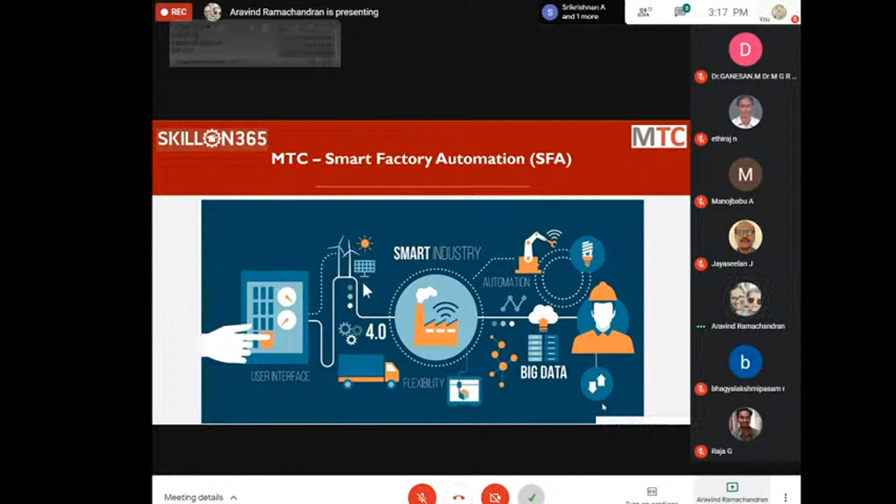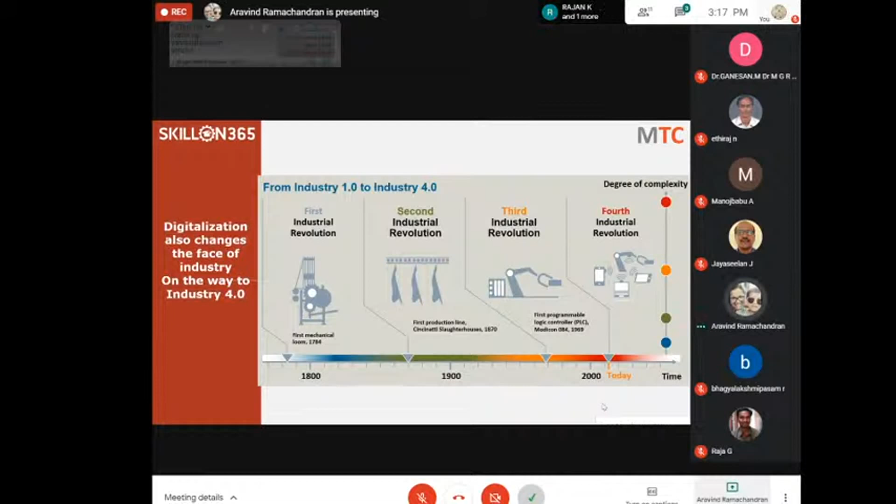This is again a common slide that we would have seen in many places - Industry 4.0, the evolution of Industry 4.0. So 1.0 started with a basic mechanical kind of assembly, and then in 2.0 a basic production line was introduced with motors and stuff like that. 3.0 is where the revolution actually started being recognized, with some kind of robotics, PLC automation, and basic automation being introduced. And then now we have 4.0. So let's see what is there in 4.0.

As I explained in the beginning, industry does not consume it just like that. Industry will look for a solution which will resolve their concerns or issues, or give them benefits and improvement, which will help them gain profits. So there are a lot of conditions or requirements that industry is looking at, and we have segregated that into 4 main modules: speed, flexibility, quality, and efficiency.

Speed to market is very relevant with the topic we are discussing today. Let's take an example - Hyundai Creta is there, and I work for Ford. I want to release a competitive car for it, say Ford EcoSport. If I release Ford EcoSport after 2 years, will I have any market share? No. I have to release something in 1 month or 2 months so that my market share is there, so I compete equally with Hyundai Creta and ensure that I have some market share.

So speed to market is very, very important that everybody is looking at right now. When I say speed to manufacturing, speed in design, speed in research, speed in testing - all those things. We want the product to be up and running immediately. Even ourselves, if we order something on Flipkart, say a mobile phone, and if the delivery time is 1 week, we ourselves get upset. We would like to have that immediately, in the next 1 hour in our hand. That's something everybody is right now looking at.

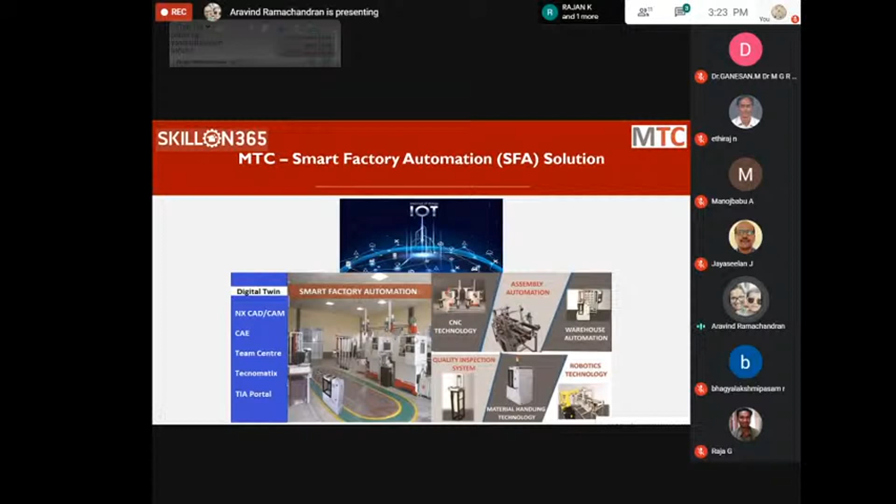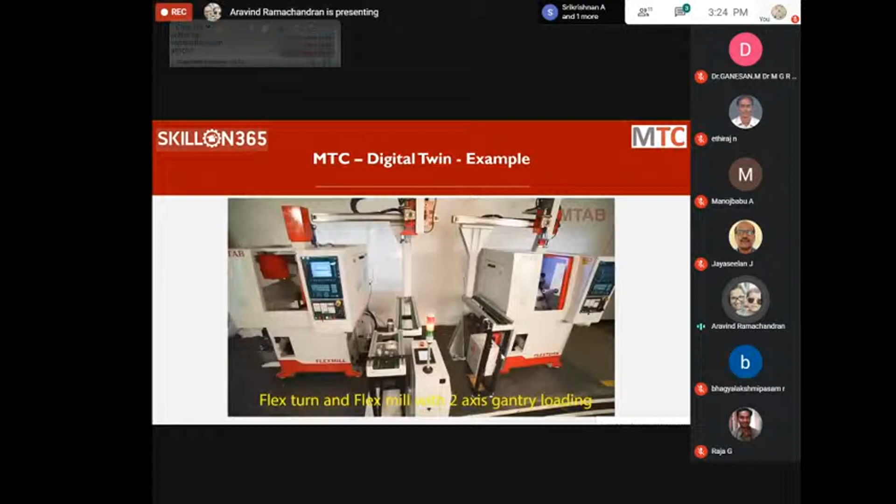This is, as I mentioned, an example of a manufacturing industry, how a smart manufacturing industry will work. So let's first, if I'm the supervisor or manager of the factory, what I will do is first I will understand the infrastructure of it. Well, in general, what are the infrastructure of a manufacturing industry? There will be one store to store the raw material or the finished goods.

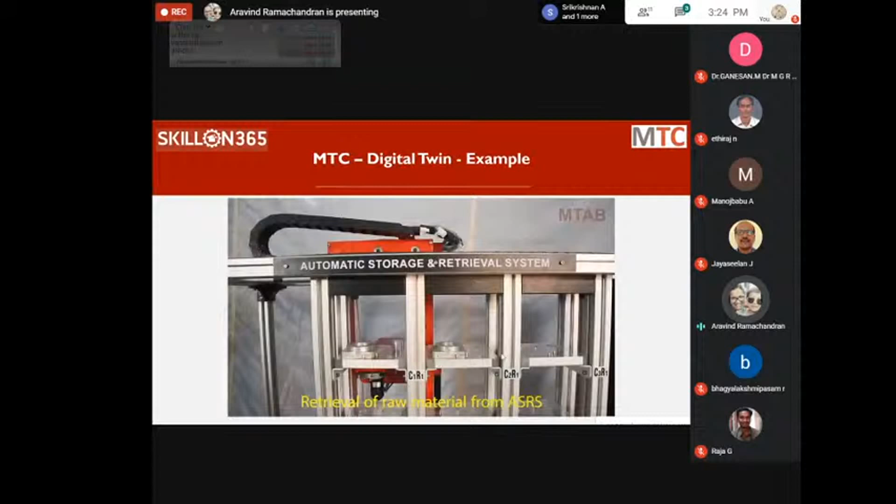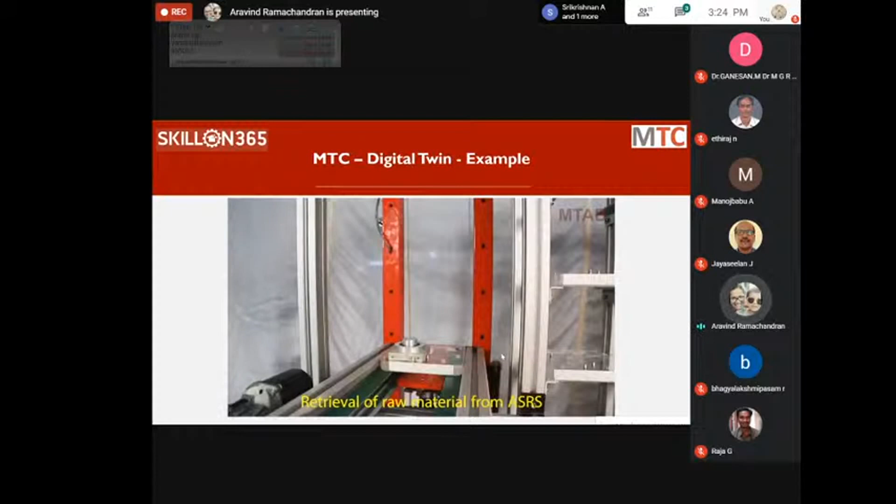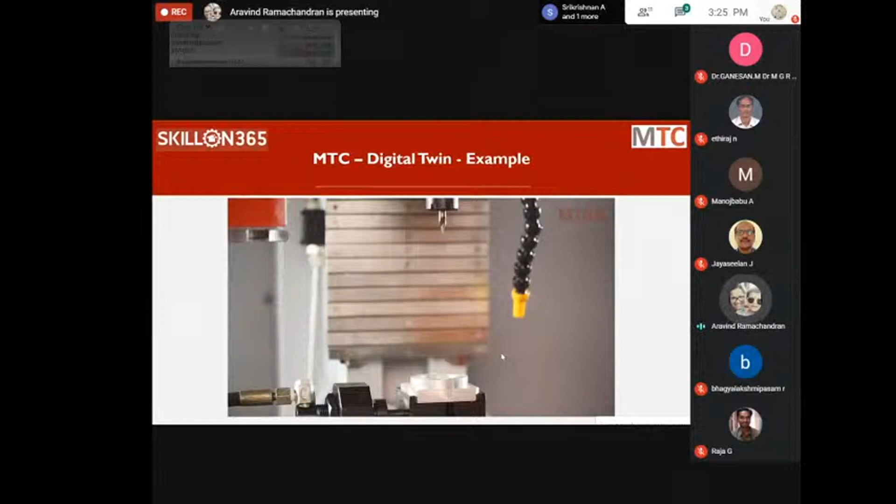Then there will be a manufacturing area, right, where the goods are manufactured, like a machine or some production happening. Then assembly area will be there - whatever components it is manufactured or produced will go there for assembly area to get assembled. Then there will be a quality department where it will be inspected for some quality checking. And then finally, according to either it has to go for remachining or just store it back, whatever it is - an inspection station for quality checking, right? So these are the infrastructure and the processes involved.

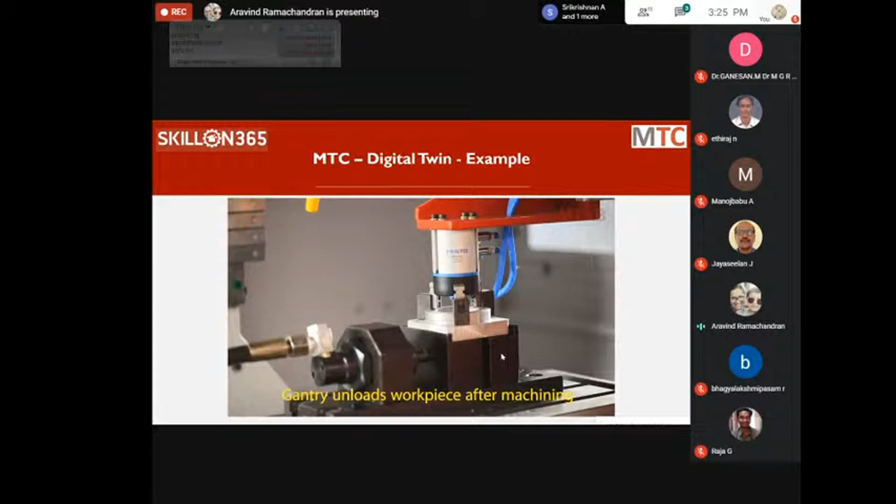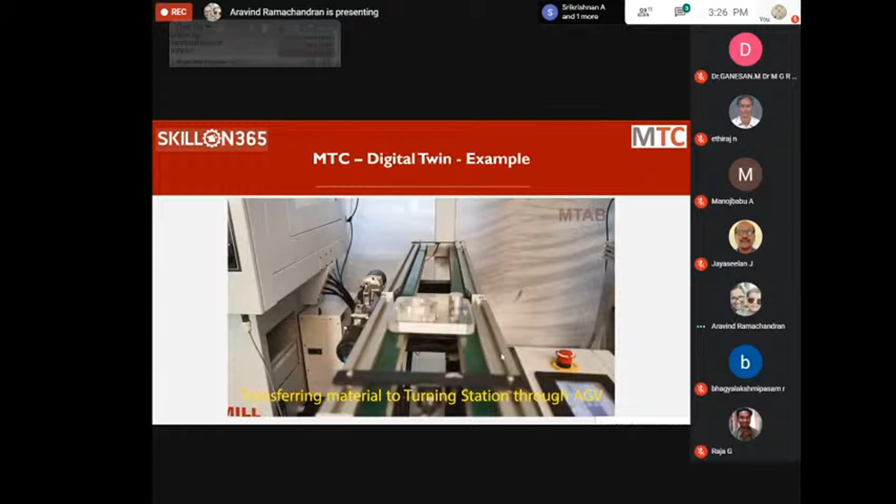And as I mentioned, this is completely automated. This is a gantry arm, a robotic gantry arm, used for automatic loading and unloading. And there is a transfer conveyor to transport the material to different areas. And this is the AGV - the one which is moving is the automated guided vehicle. So the automated guided vehicle is which transports the material to different stations. Because since it is automated, there is no manual intervention here at all, right?

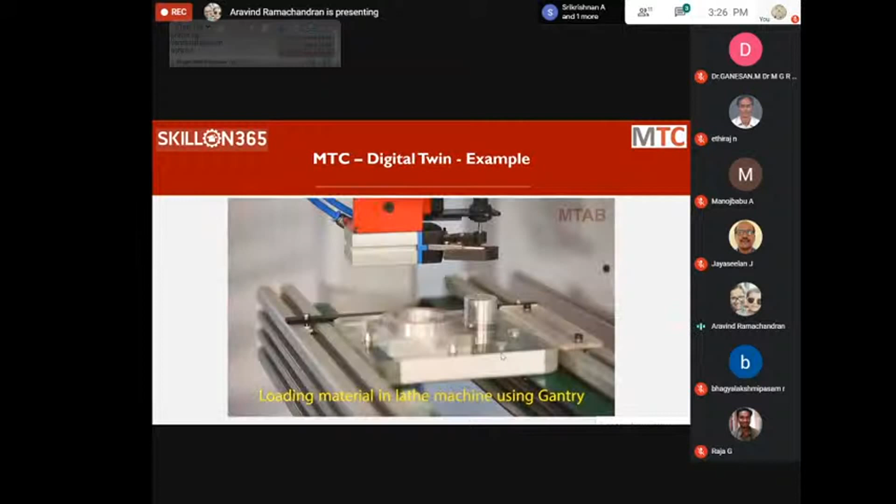So here, what product we are manufacturing is a bearing and a shaft assembly. So there is a shaft and a bearing gets assembled in it, and then there is a lock which locks it. This is the product that we are manufacturing - it's one component that we are manufacturing.

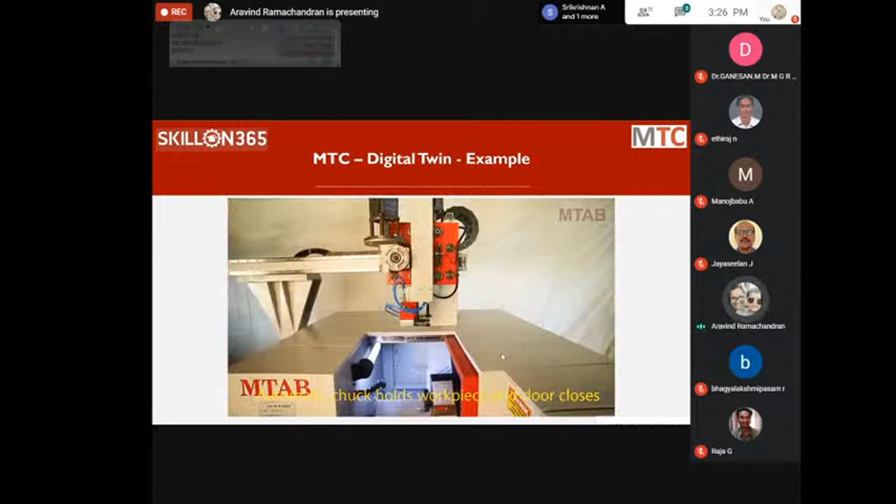In this product, there are two components: one is a shaft and the other is the lock. This is the lock, which is getting machined in the lathe machine. First, the shaft got machined in the milling machine.

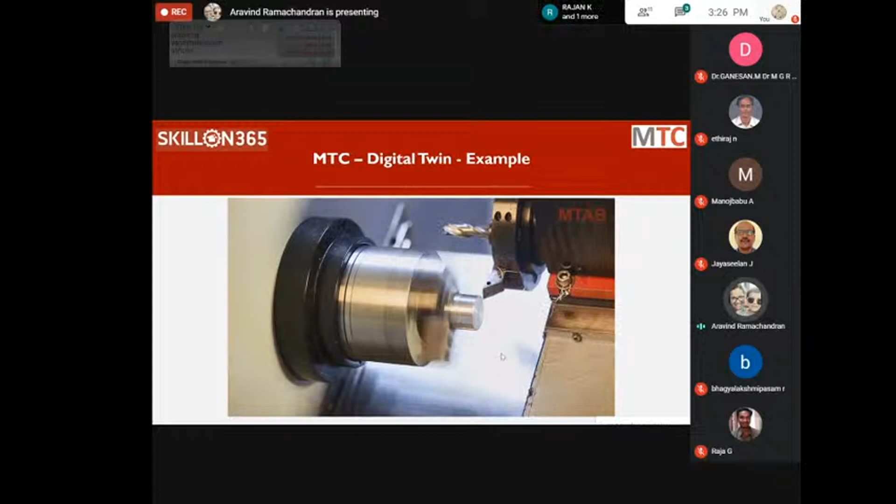So first, both these components will get machined, and once the components are machined, it goes to the assembly area to get assembled.

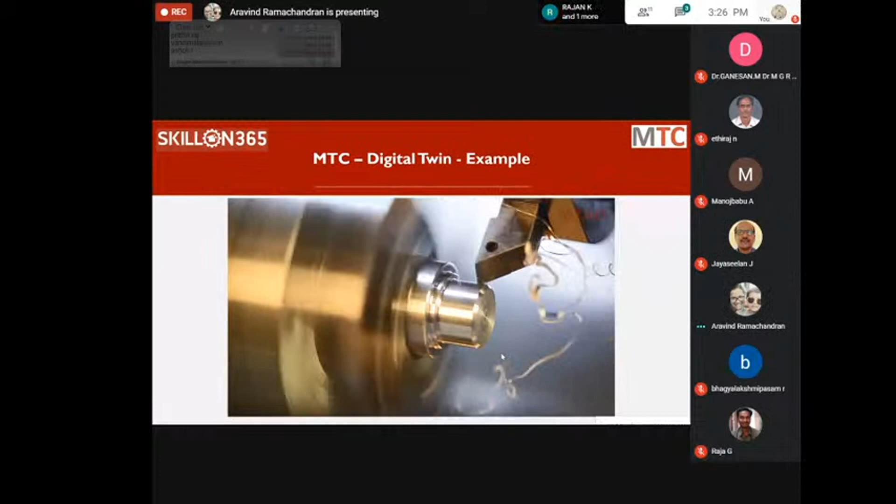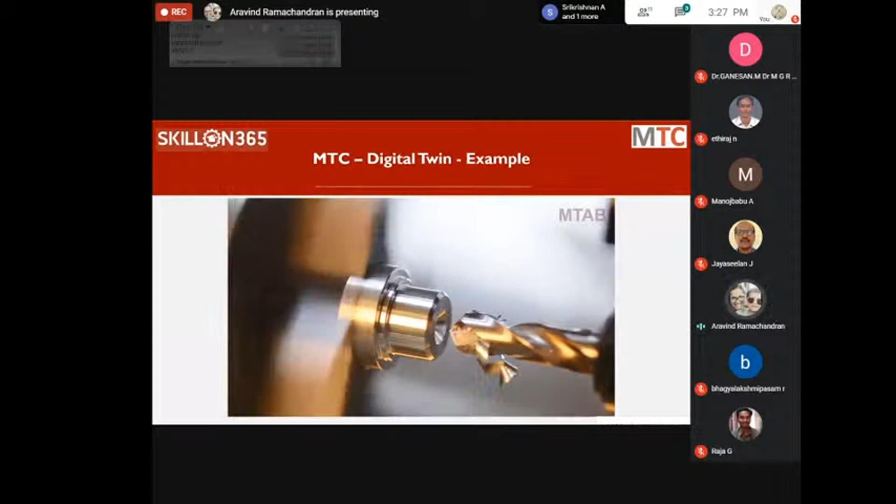Here, different technologies come into place, right? We have CNC technology, robotics technology, image processing technology, RFID technology, pneumatics, hydraulics, PLCs. A lot of things come together to make it smarter.

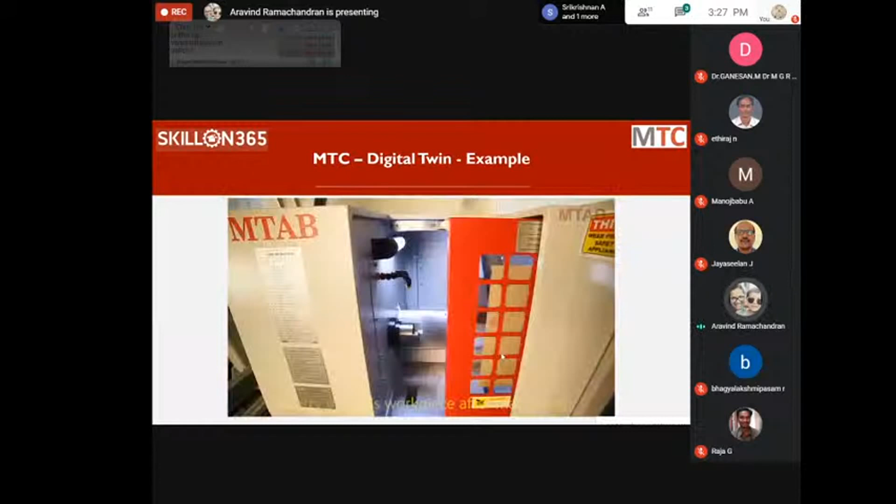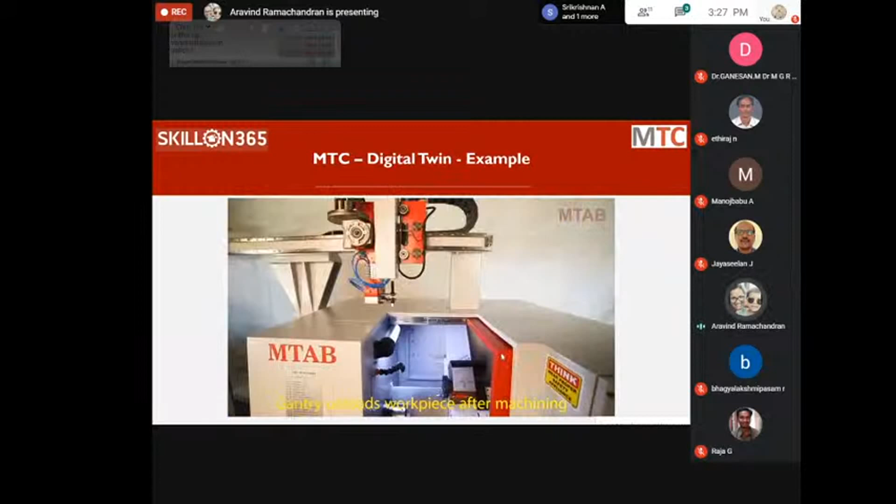The digital twin concept is a software part where you define the entire working layout and the sequence flow. Then when I press the button, automatically the sequence will run. That is the smart factory solution.

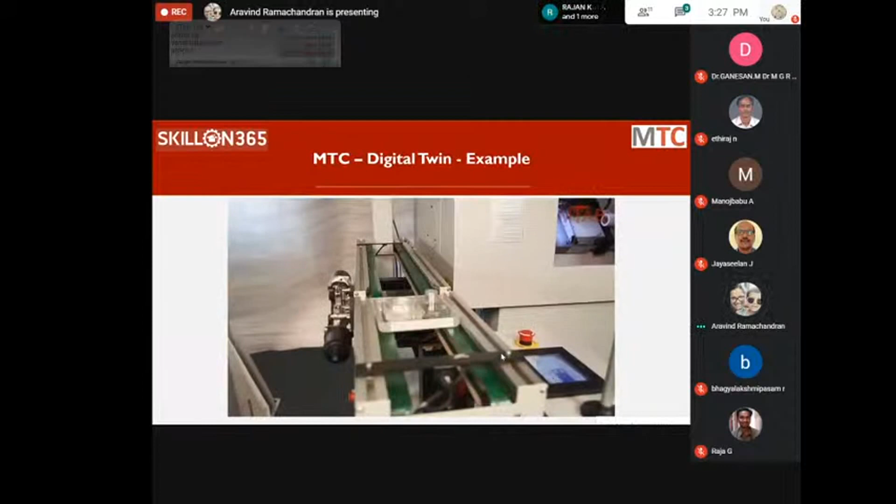So now in this video, both these components are manufactured — one in the lathe machine, and the other in the milling machine. Both these components are manufactured, now it comes to the assembly area where it gets assembled.

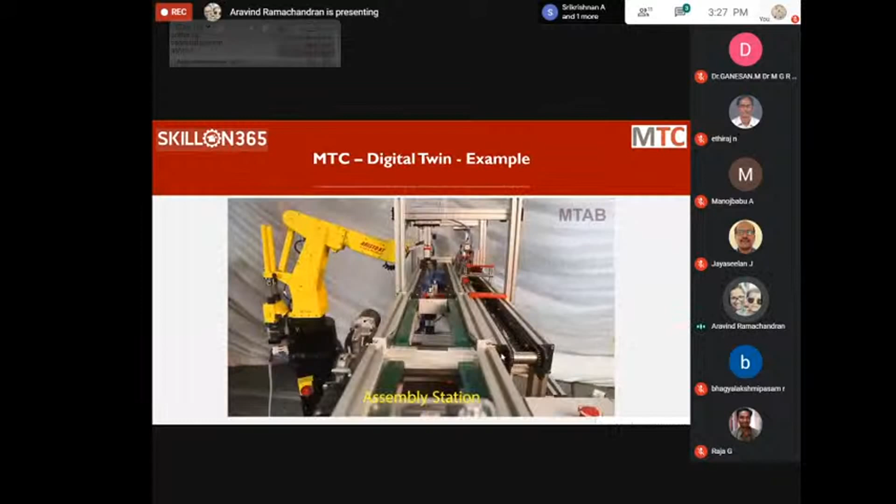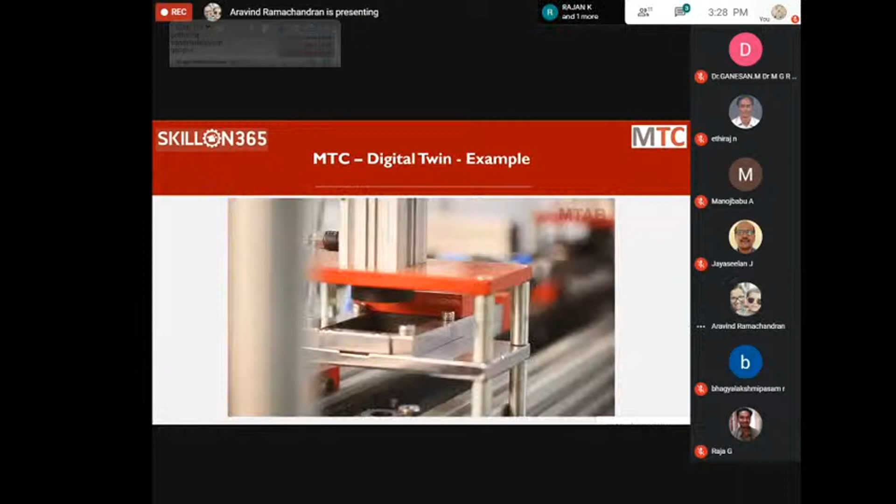First, the bearing will get assembled on the shaft. You could see the shaft going to the place where the bearing will get assembled. So the bearing got assembled now. Now the lock will get assembled.

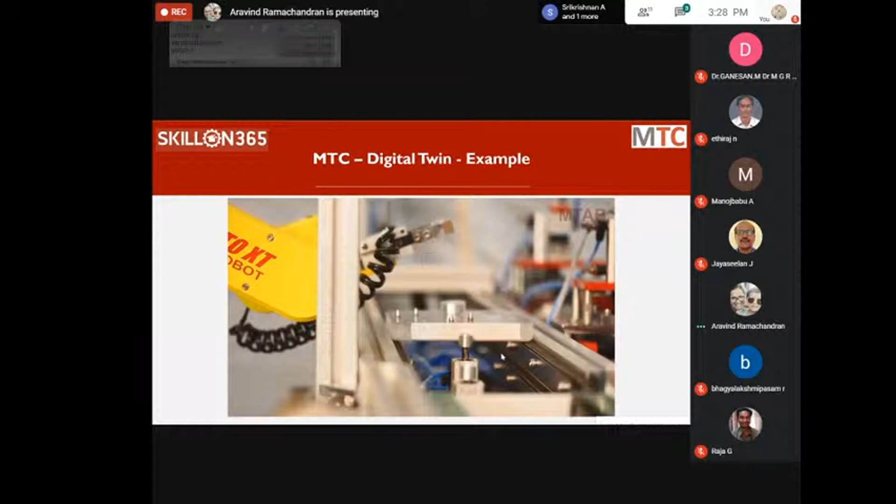The lock is getting assembled now. So now the assembly is completed, right? Once the assembly is completed, it will go to the next station.

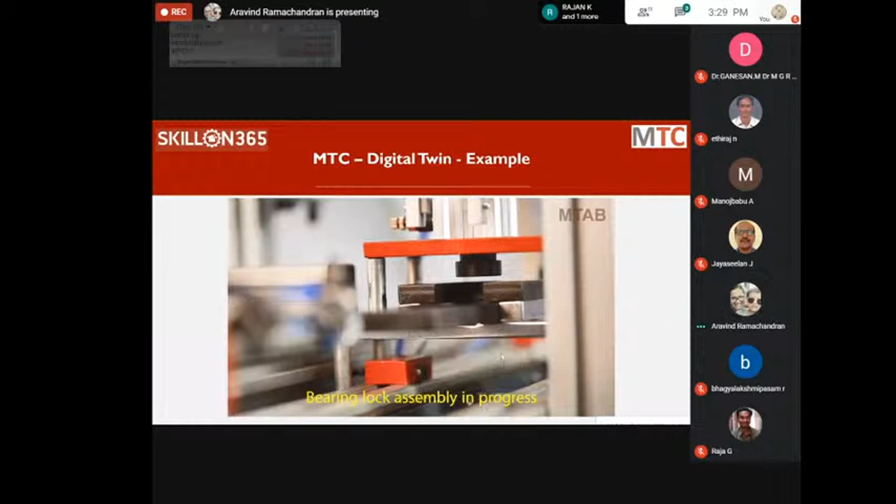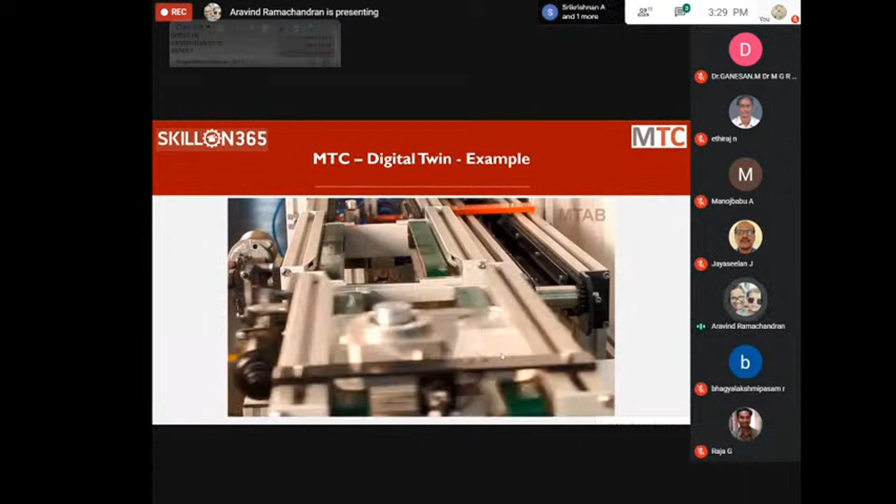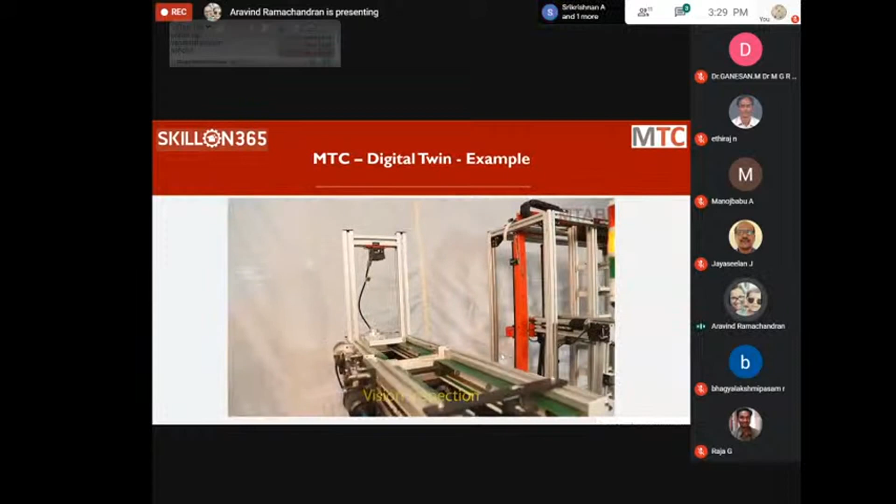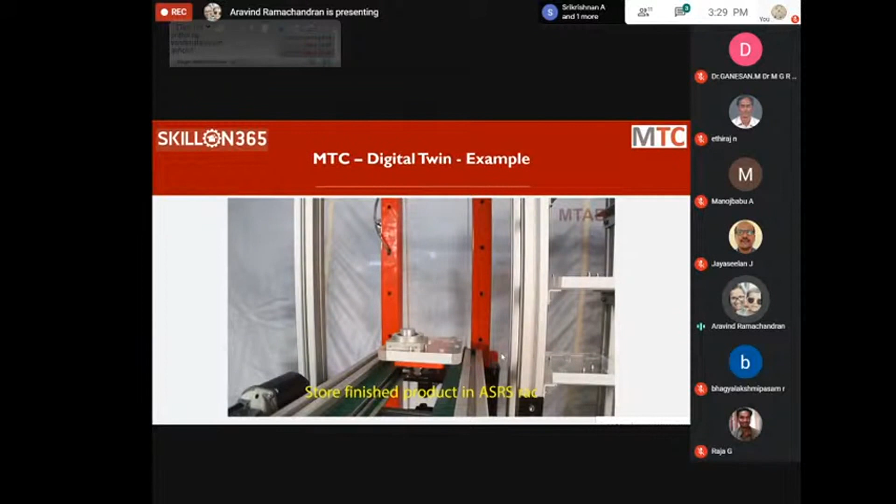Once the result is given, the central controller will take the decision whether to store this component back here or send it back for remachining. Whatever decision we mention, it will perform. So this is one example of smart factory automation in a manufacturing industry.

Today, robotics is playing a very major role in smart factory — not just smart factory, robotics is playing a very vital role in many areas. For your surprise, I saw a video where robotics is used in agriculture, to pluck fruits from the plant.

Remember, as I mentioned earlier, we have to learn the technology via the application. It is not something as simple as just learning a programming. If you take robotics, it's not just programming that we need to do — we need to understand the complete application that we are giving to the customer.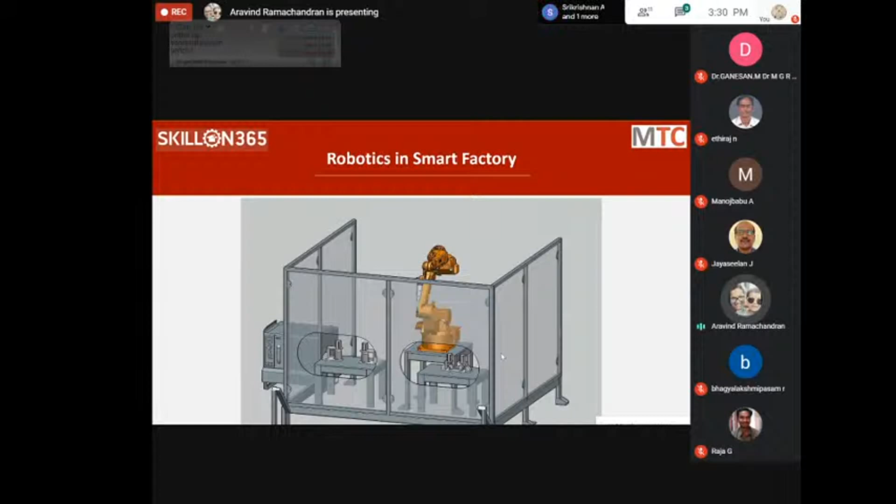I want to use my online e-learning product, Skillon365, to give you basic information on that. This will show us the different applications available in industries, which have revolutionized the industrial workplace ever since its arrival in the industrial field. According to ABB Robotics statistics from the International Federation of Robotics, most robots do very specific tasks and fall into 10 categories.

They are arc welding, or robot welding, that joins metal surfaces. This improves the safety of workers by avoiding arc burn.

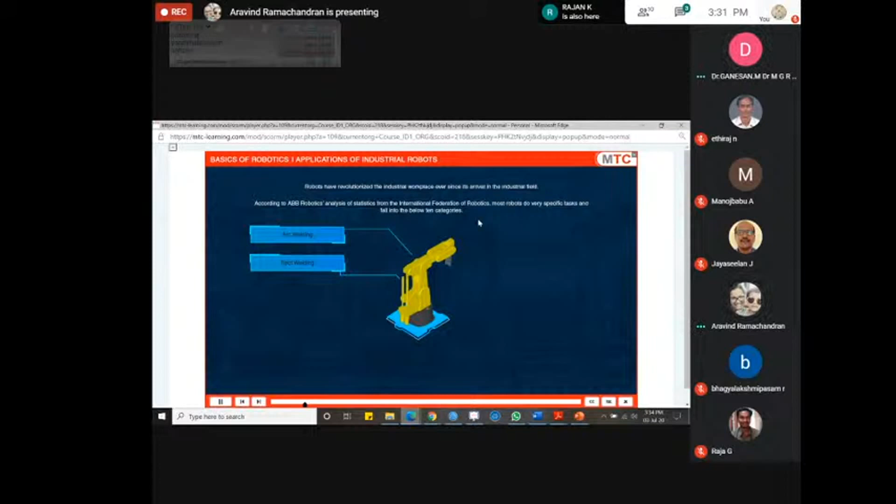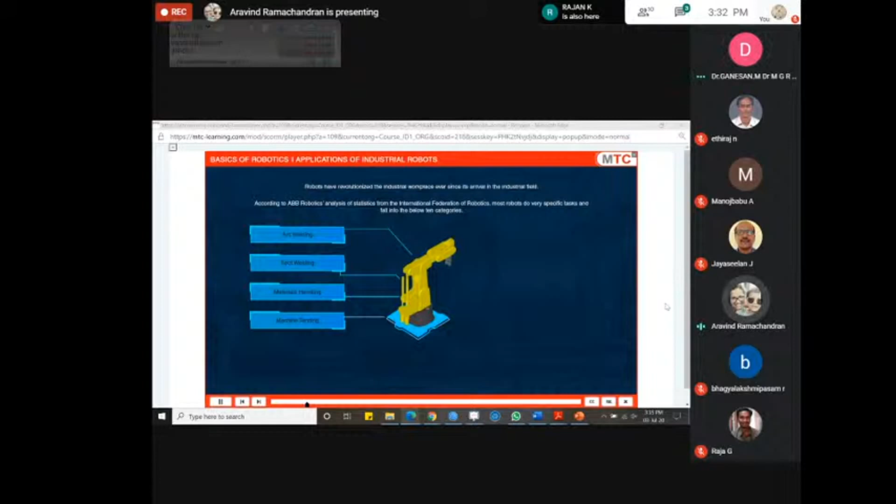The module is just giving us an idea of how robots are used in different applications. Today, the International Federation of Robotics has defined a major module of applications. Under that, there are a lot of different applications coming out, but these are the major modules of applications where robotics is used — arc welding, spot welding.

If you take today in industry, I would like to discuss one case study. There's an exhibition called IMTEX that happens in Bangalore every year. We attended that exhibition where we displayed one of our CNC machines loaded with a robot for automatic loading and unloading of components from the machine.

There, one gentleman came to our stall. With all due respect, he looked uneducated. He came wearing a dhoti and lungi, and asked me the cost of the robot. 'Sir, I want that robot, what is the cost?' I was curious to understand why he needed this robot, since he didn't look like an industry man. So I asked him, 'Sir, why do you need robotics?'

'Tell me, give me an example, what is your requirement?' So he said, 'I'm running a truck bodybuilding workshop.' If you order a truck from Tata or Ashok Leyland, you get only the chassis - you have the option to get just the chassis. Then you come and build the cabin, the body, and everything as you like. This man runs a bodybuilding workshop in Tirupattur.

So he wants robotic welding because he has a problem - he's not getting a manual welder. Even if he gets a manual welder, the welding surface roughness is not accurate or smooth, which causes a lot of quality and aesthetic issues, because he also builds a lot of luxury vehicles. So we did a case study and gave him a solution called laser seam tracking welding.

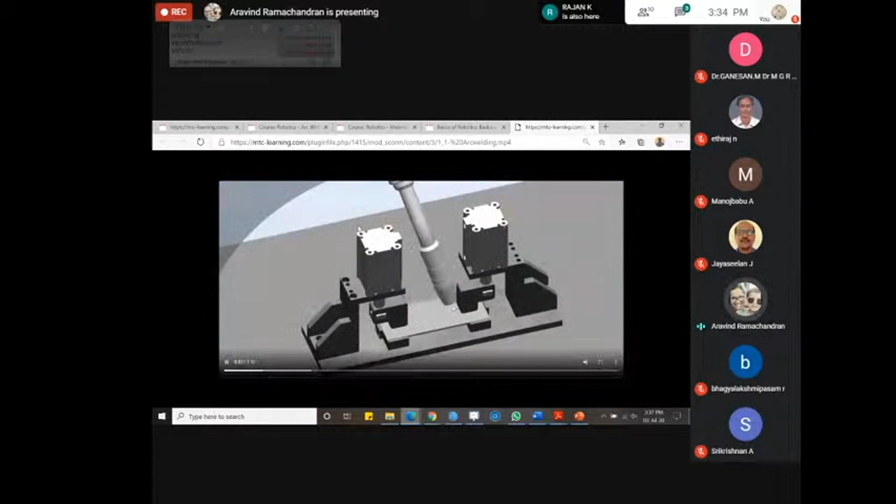This is like arc welding, a normal MIG welding operation performing the welding. What we do here is weld one laser gun next to it. It will first read the surface and give input to the robot, telling it the surface roughness of the component, so the robot does the welding accordingly. That gave him a much better finish.

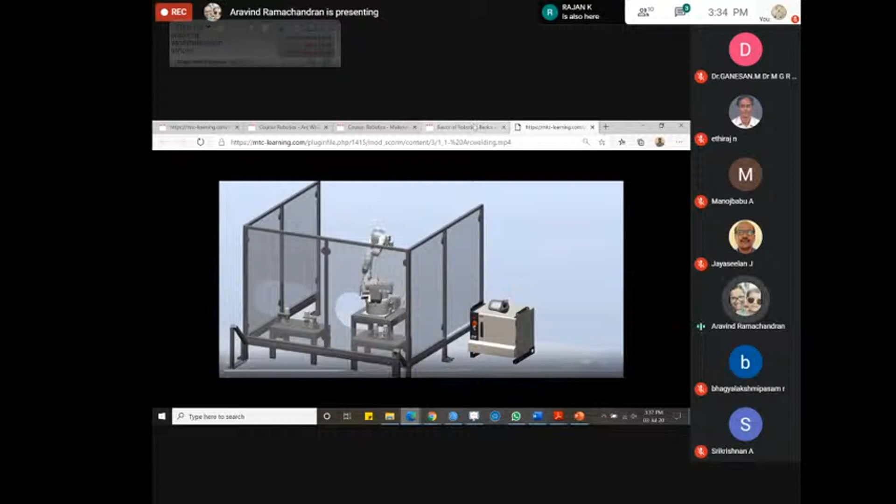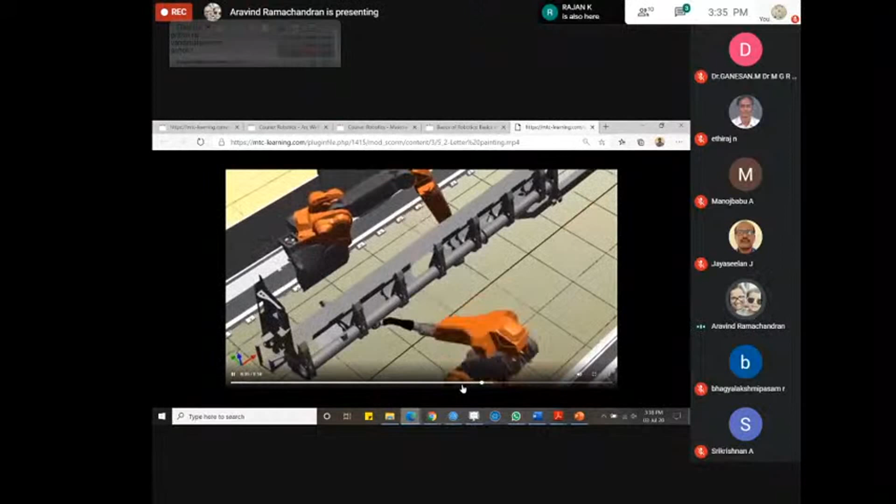So under these major applications, there are a lot of other things coming in, like picking, packing, and palletizing. As I mentioned, it's used in agriculture, spray painting, or nowadays with a lot of chemicals, and hazards are also involved. So right now many things are coming out using the robotics way. These are the major applications right now being derived as major applications under which robotics are used. This is just an example for you.

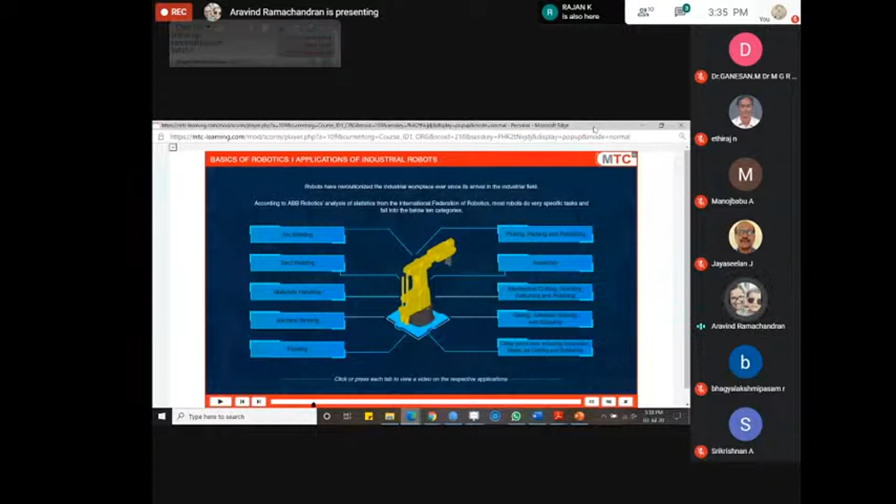I am doing this particular webinar session for many institutes right now, and everybody asks me the question: sir, will students lose their jobs because of this, or do they have this mindset from the Terminator movie, thinking the robot might kill the world? No, please understand, nobody's job is going to be taken away.

Robotics is growing very high, and there are a lot of reasons for it. Let's take an example of a very hazardous environment, like a chemical factory or nuclear cell, where humans cannot stand for a long time - there it is getting automated. If you take the factory accidents in Visakhapatnam, how big they were, and now in Neyveli, the big boiler blast and accident that happened - a lot of places are now getting automated to avoid these kinds of injuries.

If you go to Sivakasi and the areas down south, where they make matchstick boxes, small automation has been introduced there because they are not getting manual labor to pack the boxes. It's simple work, picking matchsticks and placing them in the box, but it's repeated work - 8 or 9 hours a day, doing the same work for 300 days a year. So they are also not getting laborers. I got a call from one such factory asking if we can automate this a bit, and we discussed how the process could be automated and how robotics could help.

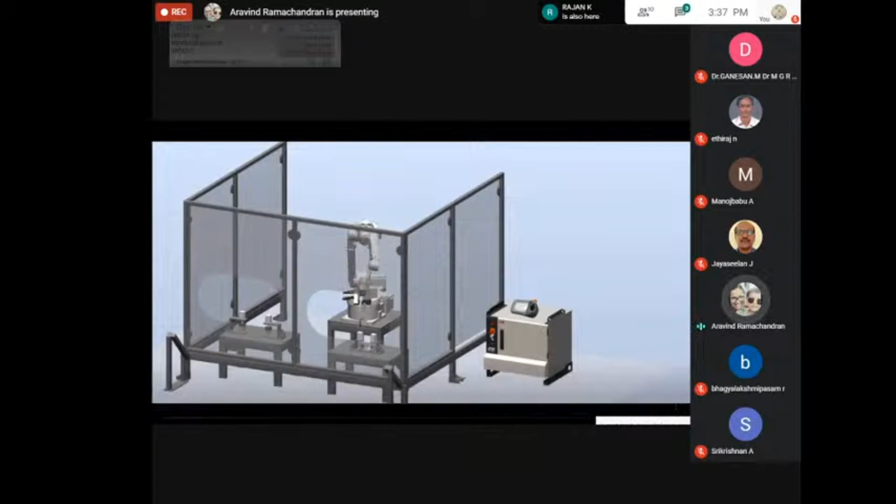Understand the kind of robotics application that is developing. This is one robotic automated cell where robotic welding is happening in an automated way. If you press a button, the robot will go to that fixture and automatically do the welding. While the robot is moving, the welding is also happening, with no shake, no jerk.

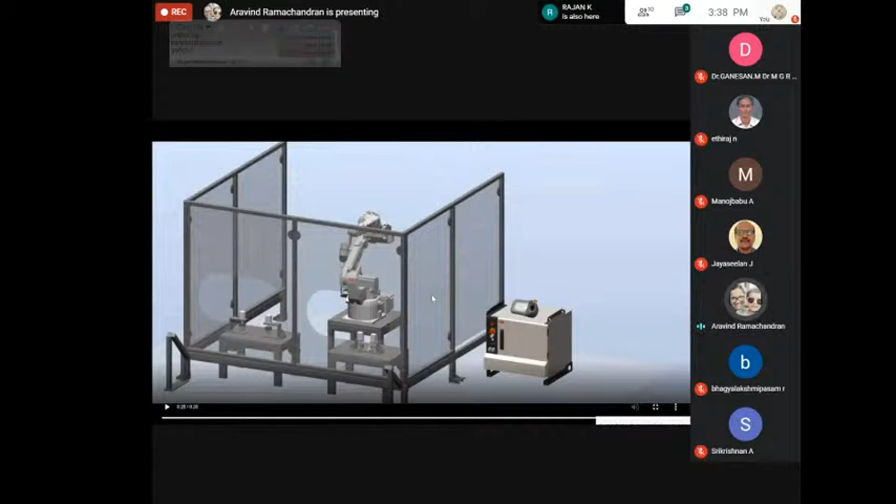There is safety, see the safety cell. Now you can program this automated cell, and automatically they can do the robotic welding operation. Thereby safety is maintained, the process is faster, quality is better, and aesthetics is also better. So automation is helping people upgrade themselves from unskilled to upskilled labor. That's pretty much on automation.

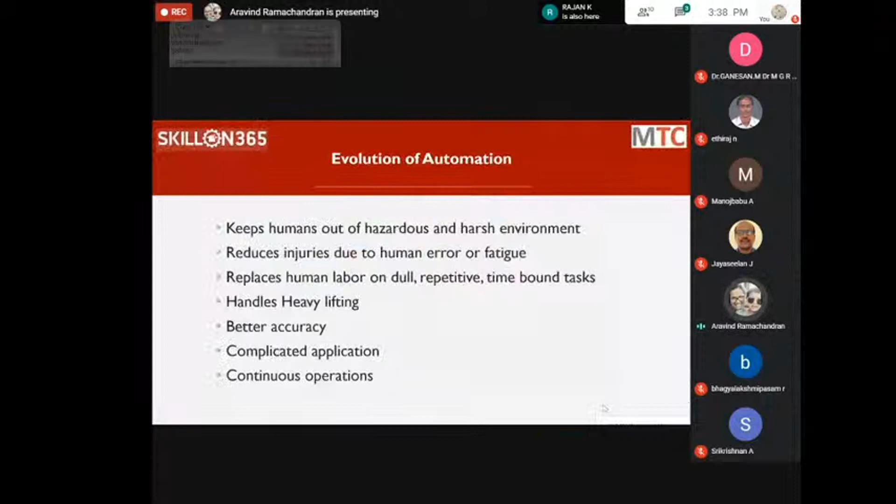With that, I would like to start now with the digital twin concept. Till now, what we saw is the smart factory automation. What is a smart factory? An example of a smart factory in a manufacturing industry, and how robotics is influencing smart industries today in many places - those things we saw now. Now, as I mentioned, on top of it, the digitalization sits in.

Now, what is this digitalization? What is this digital twin? A digital twin is a virtual representation of any physical product or process. We represent that in software or in a virtual environment to understand its performance or behavior. We are only predicting what it is performing and how it is behaving, and then we try to optimize it for a better result. This is called digital twin.

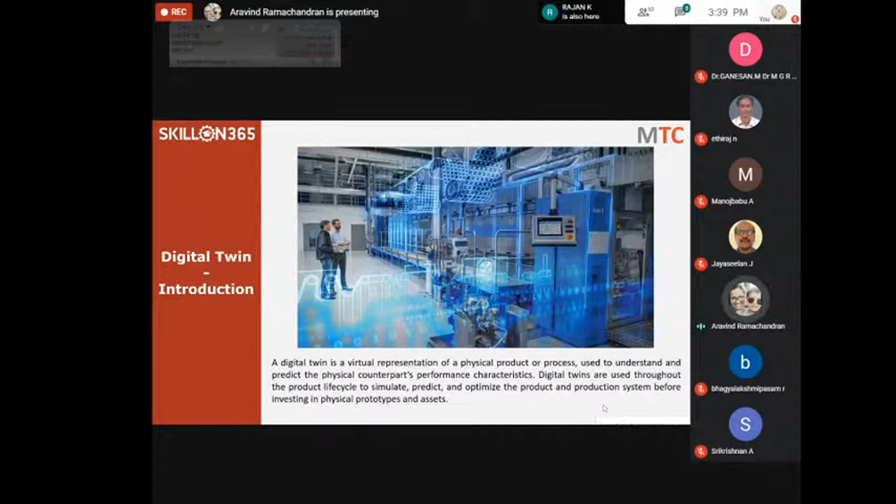I will explain with one case study. There is one industry in Delhi under our digital factory solution. They called us for some solution, as they are facing some issue. We went there. This particular industry manufactures warehousing systems - automatic storage and retrieval systems, which are huge factories.

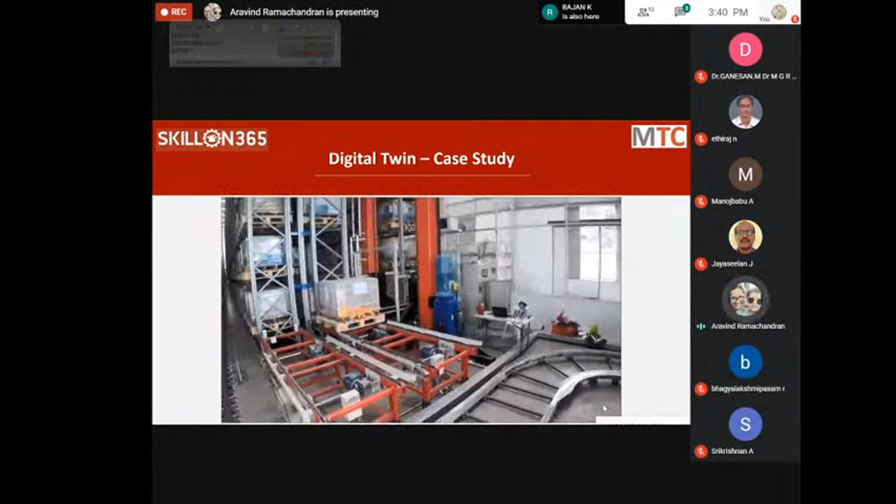They manufacture similar such factories for some e-commerce websites like Tata CLiQ, Amazon, Flipkart. I suppose you would have also seen such kind of factories in videos, on YouTube or Discovery Channel or somewhere. So they manufacture such kinds of factories and give them to various companies here in India. This is a typical example of an automatic warehousing system.

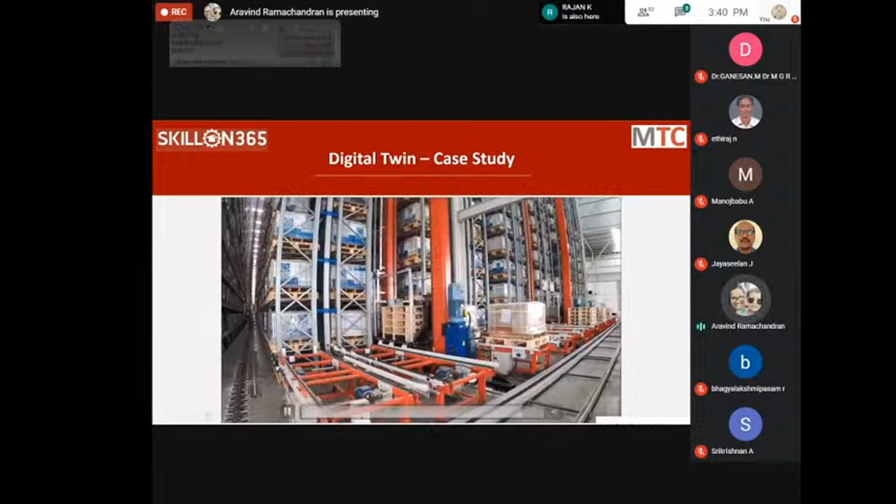Automatically the goods are stored in racks, and automatically brought in when required. These are all unique projects, not standard products that someone can manufacture and keep ready. This cell, this kind of job we see here, will vary from customer to customer depending on what is his job and what is his process.

Accordingly, this particular customer who called us for the solution will also have to design it according to customer requirement. He received an order from a similar such customer, with a delivery time of 12 to 15 months - 1 to 1.25 years. The customer is not ready to wait for such a long time. Nobody would be ready to wait, right? So 1.25 years is too high.

So the customer said, deliver it within 3 to 4 months. If not, it's fine, we are cancelling the order - we would like to import it from some other country which can be faster. So then they said, fine, we'll try to deliver, and they called us for the solution. We went and tried to understand what they are doing, and then gave them a solution.

What they do is, once they get input from the customer - the pallet size, the weight of the component, and the dimension of the component - they design the ASRS, all these racks. The warehousing systems can run even to 1 kilometer in length - that big a warehousing I've also seen. So they get input from them, and accordingly they design it. The design part, they're able to complete very quickly.

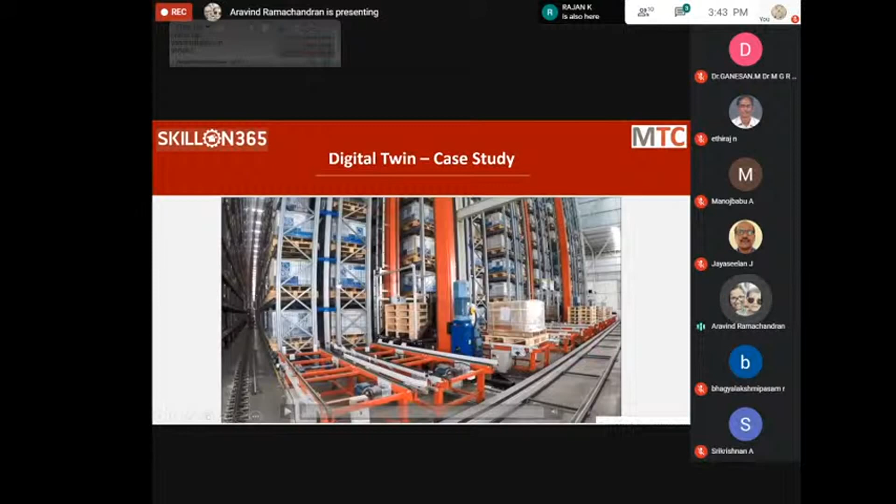There we brought in the digital twin concept. What is this digital twin concept? As I mentioned earlier, I am trying to bring this entire warehousing into a design format. It has got two parts in it - digital twin has got two parts in it.

One is the design part. Once when I complete the design, I apply the parameters in it, like physical parameters, dimensions, type of material, strength of the material, all those things. And then I apply the kinematics to it.

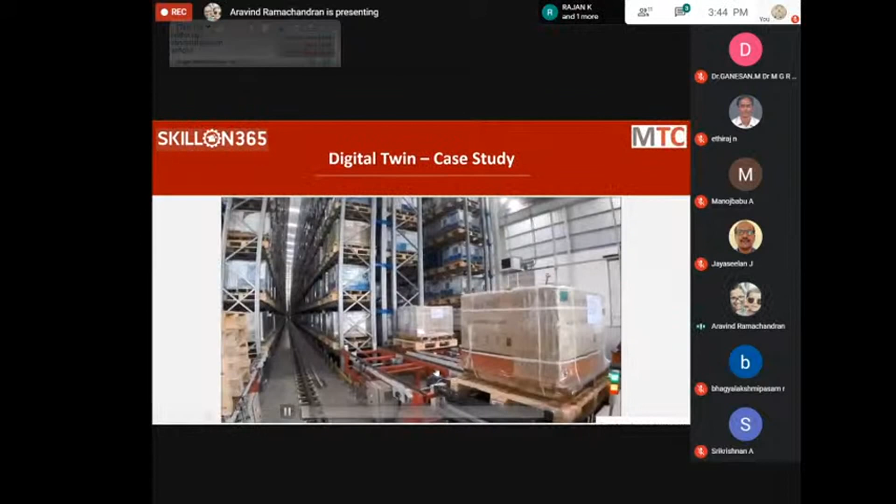Kinematics is nothing but, say in the same video, if I am moving this, it is moving, this conveyor is moving on a rail, right? There is one conveyor here which will move on this rail. There is one pallet conveyor which will pick the pallet from here. Here there is some movement operation happening, correct?

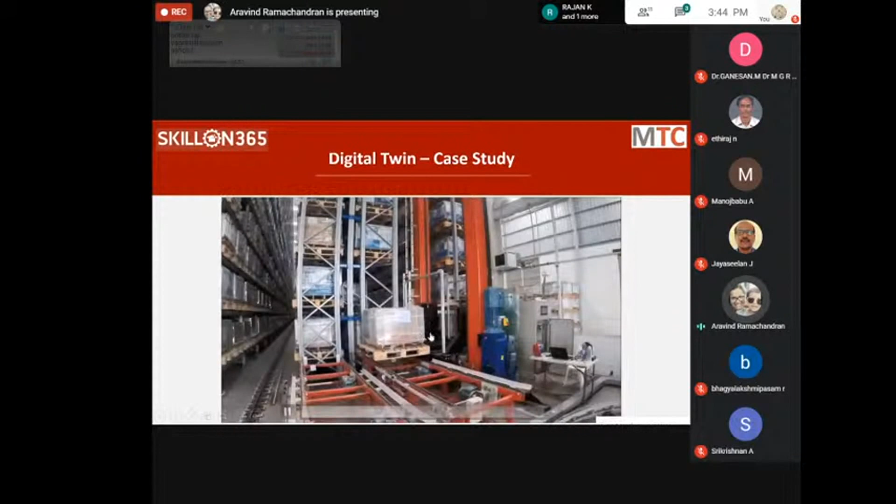And this rail will move. There is one red color conveyor rail which will move. Here there is some lifting operation, right? This is kinematics. It's the functional part.

Once when I define all the physical parameters in it, I define the functional part and I simulate it in the software itself, and I see the output. Thereby, if there is any error or issue, it is automatically going to show me. It will automatically show what we call, in our term, virtual commissioning.

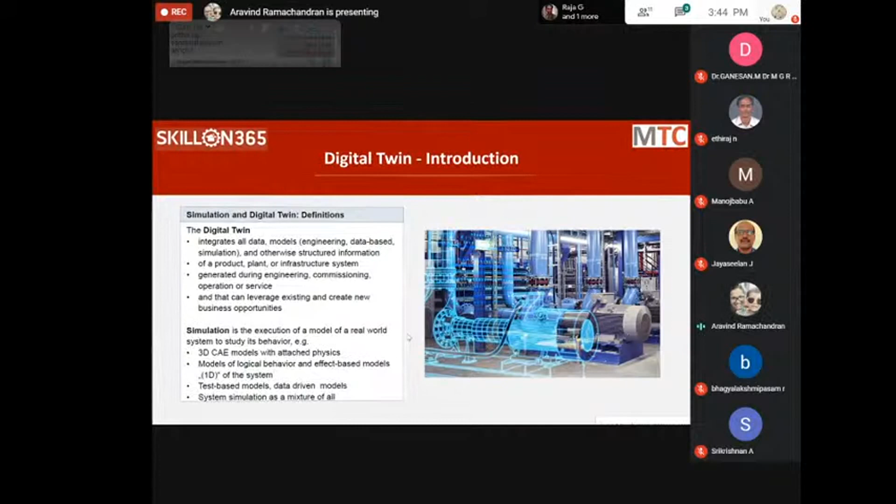What do we mean by virtual commissioning? It's like the physical commissioning that I'm doing. So once when I design, I go manufacture it, come and assemble it, fit and put the bolt nut and all to see how it is connecting, right? Instead of doing that, what I'm trying to do is do that in the software part.

Once when I design it, I come and virtually commission, assemble it, put the bolt nut. Say for example, if it is a robotic cell, I will import all the arms and connect it with the shaft, the gears and motors and wires, right?

After I do the commissioning, then I connect it to the controller, like a robotic controller or a PLC controller or a VFD, and I will try to give an input from there and see how the robot is performing in the virtual environment wherever I have assembled it.

So if the robot is not moving as per my desire, or it is hitting, or there is a jerk, all those issues it will showcase there. And then I can correct that there itself, and I can optimize it, right?

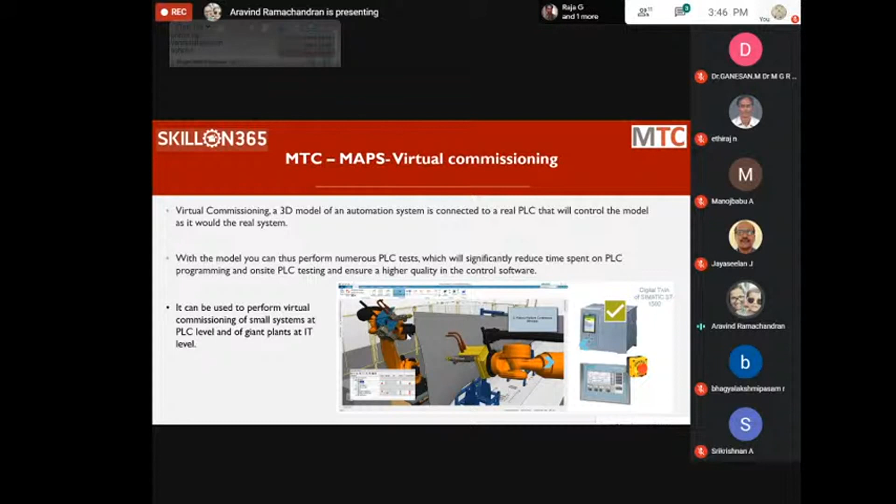So remember in the beginning of the slide where I mentioned about speed to market? That speed to market I'm trying to achieve here, making my process and product optimized in the software itself rather than wasting my time in the hardware, in the physical environment. This is called the digital twin concept.

To take an example of virtual commissioning, let's see, we will be seeing a lot of examples on it. One example on virtual commissioning is an ASRS. In this presentation, you will be predominantly seeing only our product, our videos and all, because as per our NDA terms, we are not supposed to share any customers' videos or customers' cases.

So that's why we are trying to use most of our video for installation, because it is in our control. So here we do one particular testing in the ASRS: pallet movement testing with the PLC.

So this is an ASRS with 18 pallets. There is a pallet conveyor. This is connected to a PLC, an actual PLC. This is in the virtual environment, and it's connected to an actual PLC where we write the ladder logic, and I give an input from the ladder logic and see how my ASRS is performing.

So for example, if I say move ASRS to pallet position number 1, whether it is moving to position number 1 or not. If it is, and I say retract back to the home position, whether it is moving back to the home position, that we can test it.

Here, please understand, there are chances where the program can also be wrong. So if the program is wrong, error will happen. Accidents can happen, which is again going to be costing. So here I'm trying to validate my program also, not just the design part.

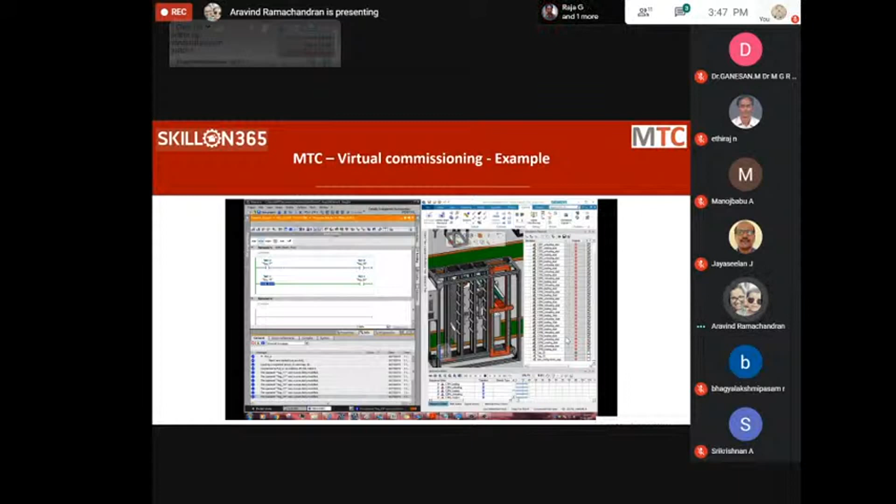So once when both these things are confirmed, where I'm saying everything is fine, then I can straight away go for the hardware manufacturing and assemble and connect it all to the PLC, and I can directly transfer this ladder logic also into the PLC, because I've already tested and validated it's working fine. I need not go write the ladder logic program again. So this is an example of virtual commissioning.

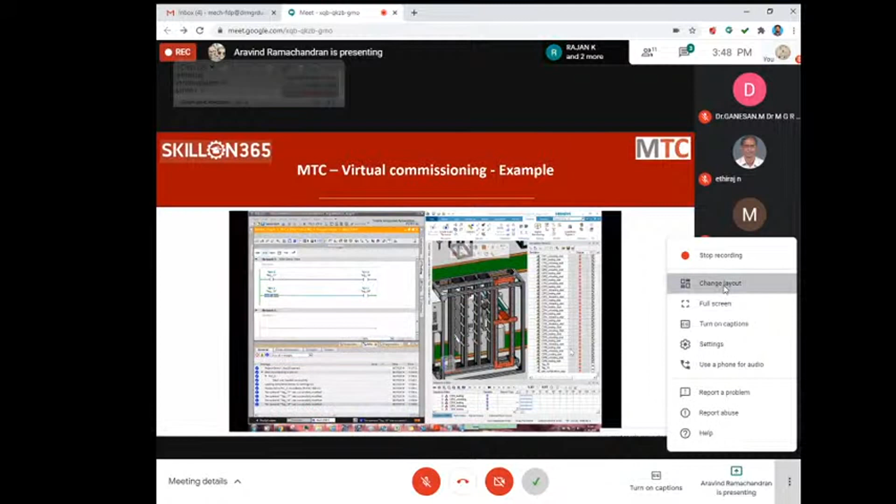Digital twin concept has got 3 major modules: product digital twin, production digital twin, and performance digital twin. When I said speed to market, which involves speed in production, speed in designing, speed in testing, speed in research - that all constitutes speed to market. So that's where speed in product and speed in production comes into play - digital twin product and digital twin production - and then digital twin performance comes into play.

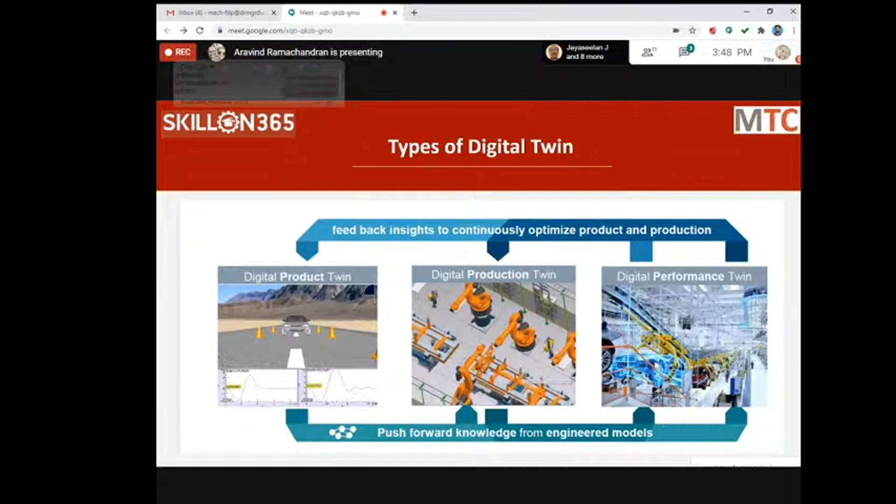Let's see what this is. As I mentioned earlier, digital twin is nothing but prediction of information, prediction of data on its performance, behavior, all those things. It is not actual data, it's only predicting. And we are predicting the errors that can come and optimizing the product. That is digital twin.

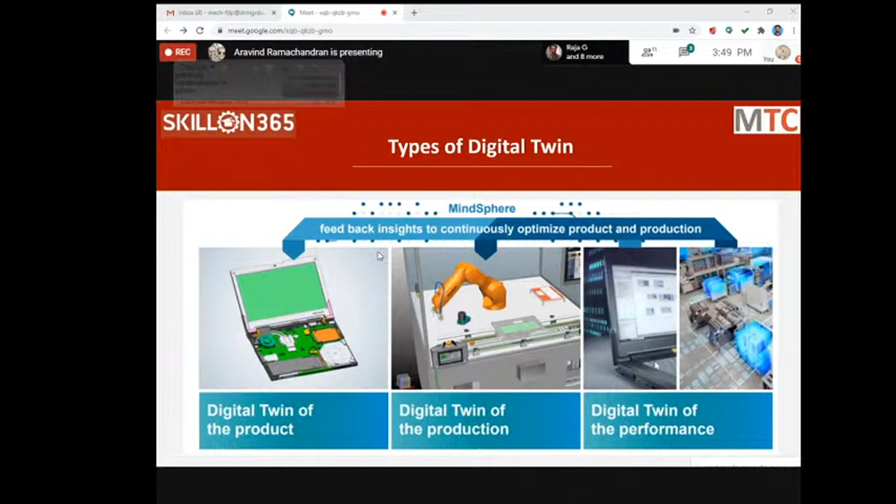So here, the first two, digital twin product and digital twin production, are on those individual things which will predict data. Performance is nothing but getting actual data on the live performance of that particular product or process. So that we are predicting, and we are giving that as an input back to the digital twin product or digital twin production to optimize it much better. So that's how the optimization completely drills down. So we're going to see individually what these individual digital twins are, in depth. Product.

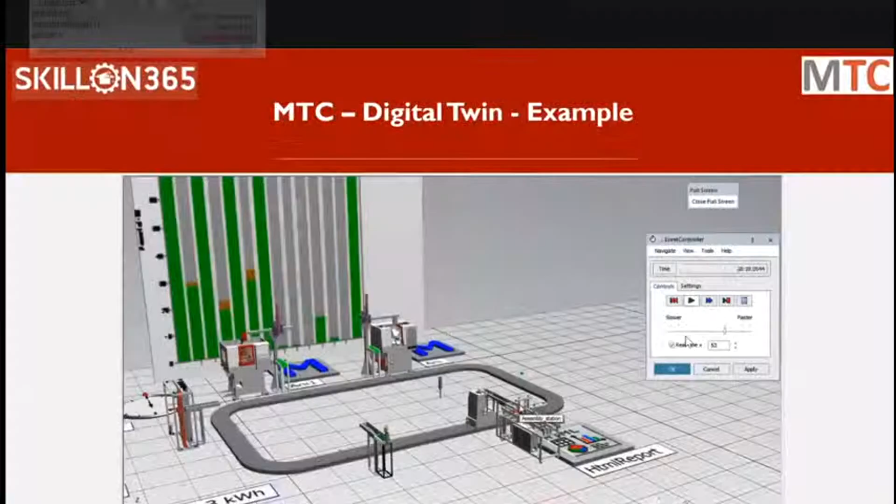Mr. Aravind? That is a loss that the company will hit. So nobody is ready to actually take a risk in testing this out in the existing infrastructure. That's where the digital twin concept helps them to improve it.

So I can do all these if-and-else conditions here and generate a report - what is the current report and what is the optimized one, a comparison. Put some charts, some graphs, get some details on it, and then I give the best possible conditions or best case implementation to the owner. Then they can implement it however they want - phase wise, department wise, or equipment wise, however they want to do, they can go and implement. So this is the digital twin production line. This way it will help you give optimized results of how a production floor can be implemented.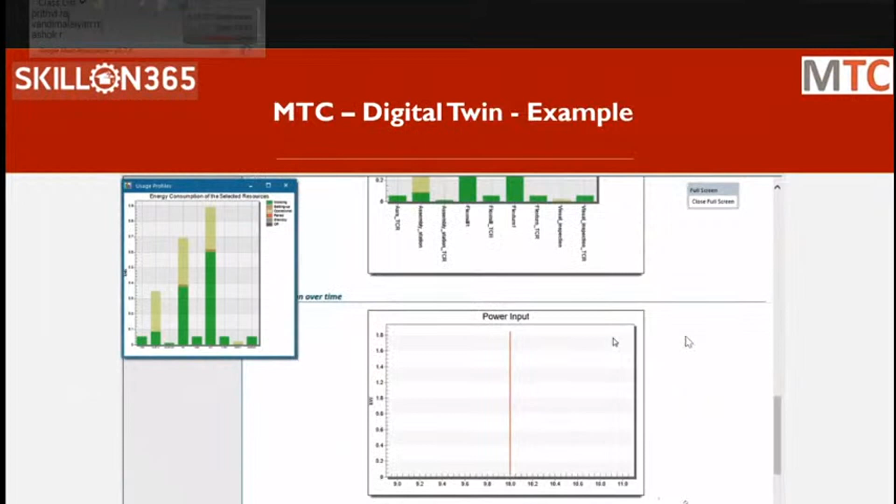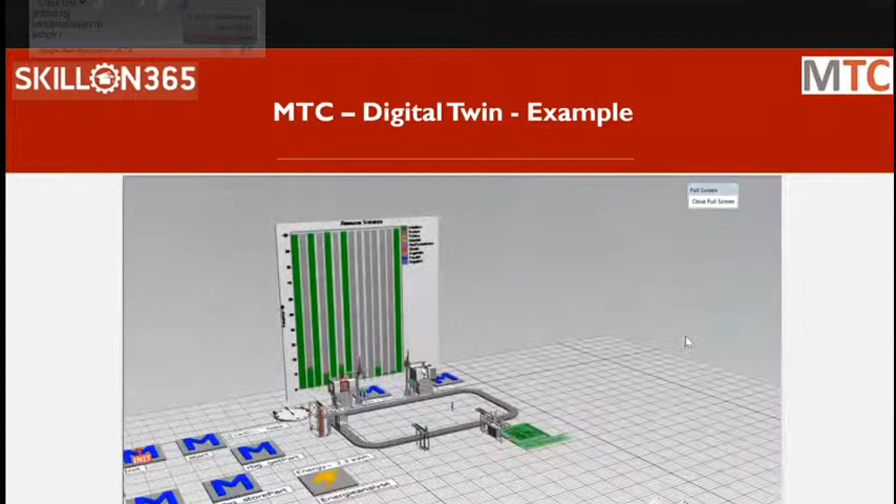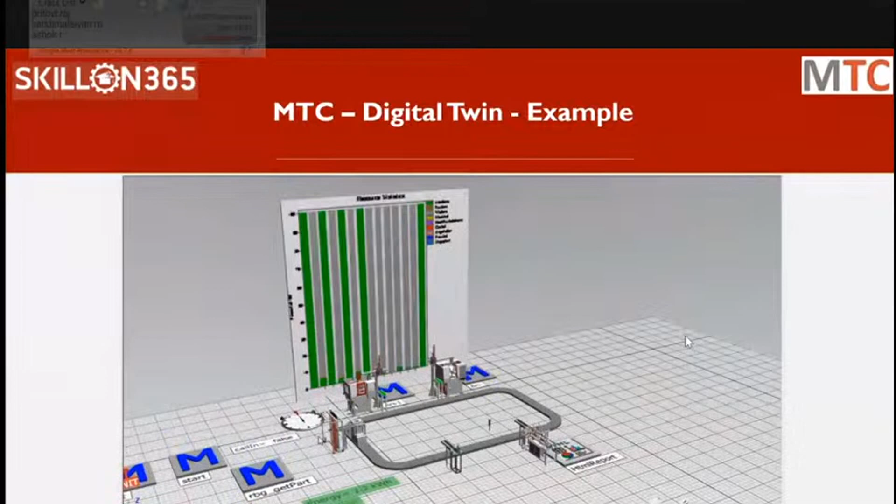This is the production digital twin. Till now, whatever we saw is predicted data, correct? These are not actual data. Now using that predicted data, we do things, and then we are going ahead.

But after implementing, right now we are coming into performance. We are trying to analyze the current performance, the live performance of it, and that will be given as feedback back to the digital twin to optimize either the product or the production line or whatever it is. It will get optimized, and then we can implement it again. That way, we are continuously optimizing it.

Now comes the performance digital twin, which is nothing but the IoT. Today we are not going to discuss in depth about IoT - it's again a huge topic - but how IoT is used in Industry 4.0 today, how it is influencing it, what it is. Because this is one of the major factors of Industry 4.0. Let's take a case study.

I'm the owner of the factory. I want to know what is happening in my factory. So at around 2 p.m., I call my manager and ask him, hey, what is the output of the morning shift? Can you give me the complete data? So what he will do - the manager would have the supervisor or some operator or somebody write that information in an Excel sheet. He will collate the data from all these people.

And then he will build some graphs, some charts, and manipulate the data. By the time he sends the data to the owner, it will be 5 or 6 o'clock in the evening. We are done for the day - we can't do any changes. Then if we have to do anything tomorrow for efficiency, we are lost. The owner is expecting some information immediately - it could be some emergency, it could be a market situation, he wants to give some input to the factory. That is how today's situation is in various industries.

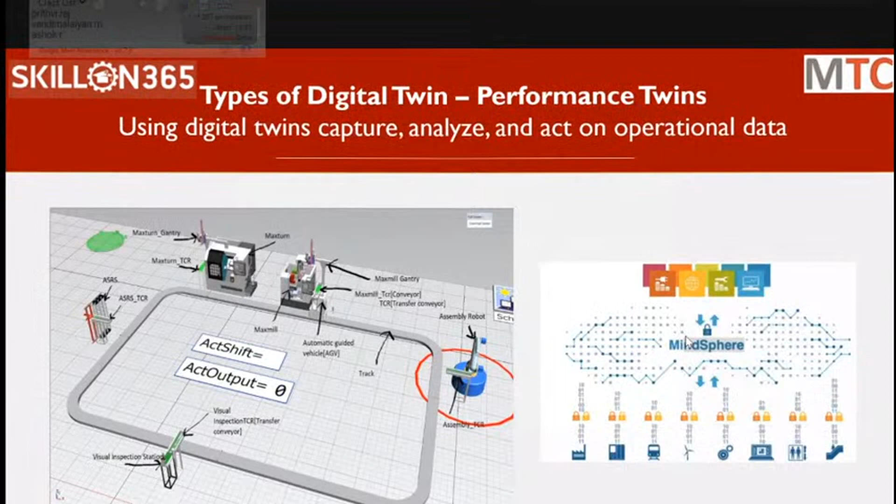IoT has got 4 major processes. First process is connecting things. Connecting things means first the process is where there is a central controller. That central controller is connecting equipments in that machine in the factory, right? And it could be individual product wise or all the equipments, that doesn't matter.

So the central controller will connect to all the equipments in the factory and collect the information possible. Today there is a lot of smart machines coming in, and the machines are all capable of giving as much information as possible out, right? So it will collect all this information and push that information to the internet, that is the cloud. Process number 2 is data analytics, which is nothing but structuring the data.

See, in a factory, there will be an owner, there will be a maintenance engineer, right? These are some of the roles. A maintenance engineer would like to know what are the alarms that is coming out from the machine. An owner might not need it. An owner will not want to know what are the alarms, what is the oil level of the machine.

No, the owner would like to know what are the total manufacturing components, how many components did it manufacture, what is the total uptime of the machine. These are some of the information that the owner might need, right? So different people need the data structured differently according to the different people. That is writing an algorithm to structure the data. That is process number 2.

Process number 3, application development. Presentation today is a very major factor, right? If you take this particular topic, if I'm doing it without a presentation and video, rather trying to give you a textbook with a lot of text, paragraphs of text, you might understand it, but it will take time. You have to read through it and then understand by yourself. It will take a long time for you to understand.

So it is something that is very important for all departments to have knowledge on IoT. So today, just to summarize, we saw an example of a smart factory in a manufacturing industry, and how a product digital twin influences in terms of individual product, and how a production digital twin on overall factory performance predicts it. On top of it, the IoT sits in for live performance analysis, giving this as feedback to both these things to keep continuously optimizing things. So that's what we saw today.